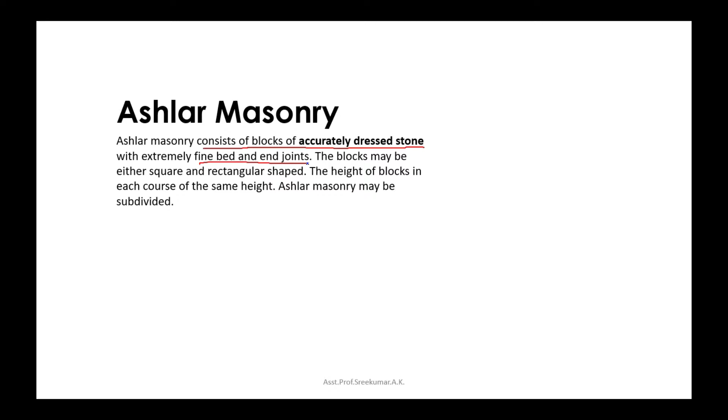Now let's move on to the next topic: ashlar masonry. Let's look into its definition. Ashlar masonry consists of blocks of accurately dressed stone with extremely fine bed and end joints. Bed joint is the horizontal joint and end joint is the vertical joint, so it consists of blocks with perfect horizontal and vertical joints.

The blocks may be either square or rectangular in shape. The height of stone varies from 25 to 30 centimeters. The height of blocks in each course is of the same height.

Ashlar masonry may be subdivided into the following categories: ashlar fine tool masonry, ashlar rough tool masonry, ashlar rock, rustic or quarry faced masonry, ashlar chamfered masonry, ashlar block in course masonry, and ashlar facing masonry.

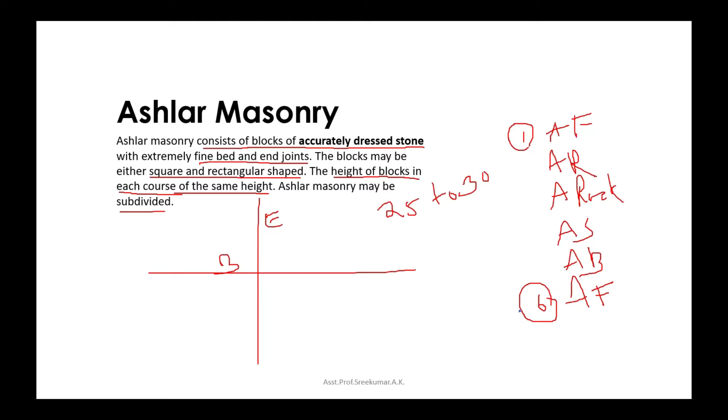Now let's look into the detail of the first type of ashlar masonry, called ashlar fine masonry. This is the finest type of stone masonry work. Each stone is cut into rectangular required size and shape so as to have all sides rectangular, so that the stone gives perfectly horizontal and vertical joints with the adjoining stone, as you see in the figure. The beds, joints and faces are chisel dressed such that all waviness and unevenness is completely removed and a fairly smooth surface is obtained.

The thickness of the courses is generally not less than 15 centimeters. The width of stone is kept less than its height. Headers and stretchers are laid alternatively in each course, or course of headers. The thickness of mortar joint is kept uniform throughout and should not be more than 5 millimeters. The exposed joints are finely pointed.

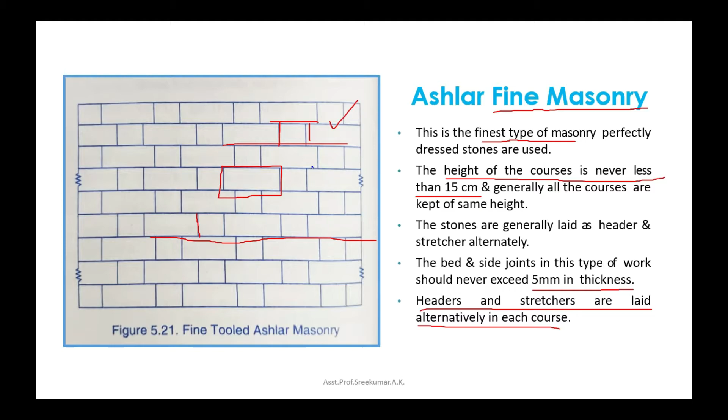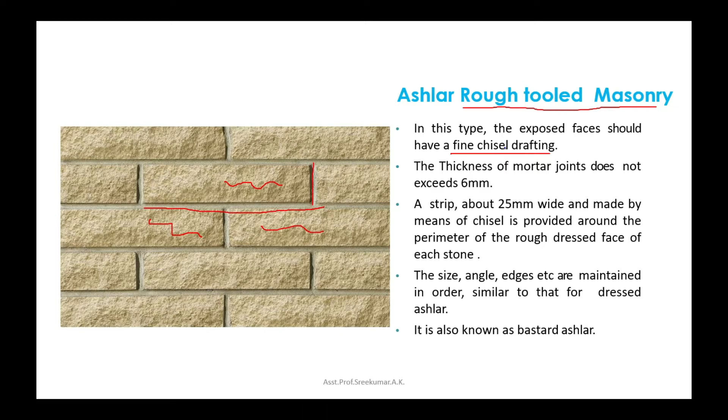Now let's get into the detail of the next type of ashlar masonry: ashlar rough tool masonry. Here the beds and sides of each stone block are finely chisel dressed, just in the same manner as for ashlar fine masonry. But the main difference is that the exposed face is dressed by rough tooling, so the exposed face of the stonework is maintained as it is, quite rough.

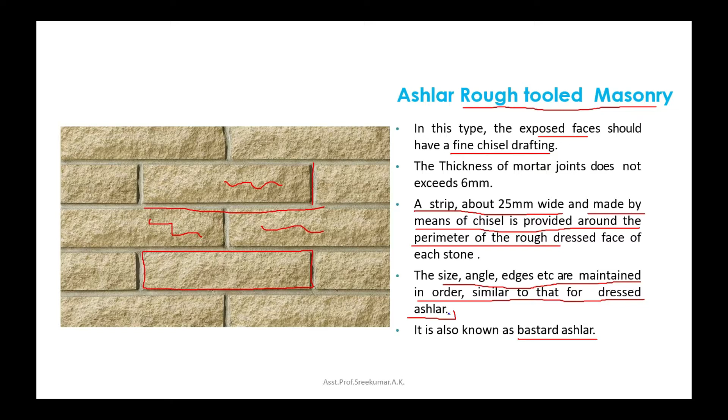A strip about 25 millimeters wide is made with a chisel around the perimeter of the rough dressed face of each stone. This type of masonry is also known as bastard ashlar. Here the size, angles, edges, etc. are maintained in order similar to that of dressed ashlar masonry. The thickness of the mortar joint here should not be more than 6 millimeters.

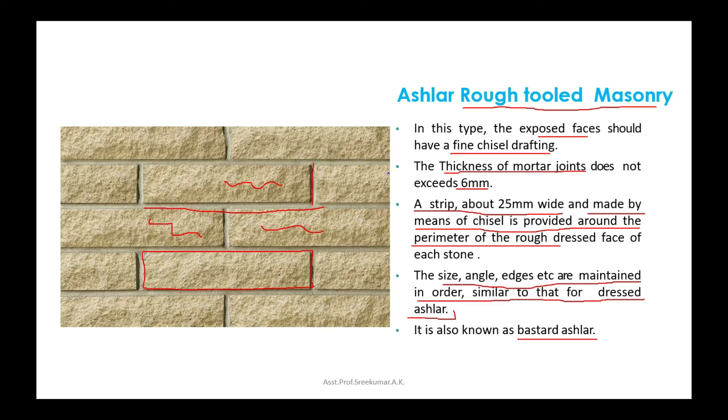Now let's look into detail the next type of ashlar masonry, called ashlar rock face masonry. In this type, the exposed face of stone is not dressed but is kept as such so as to give rock facing. However, a strip of about 25 mm wide made by means of a chisel is provided around the perimeter of the exposed face of every stone.

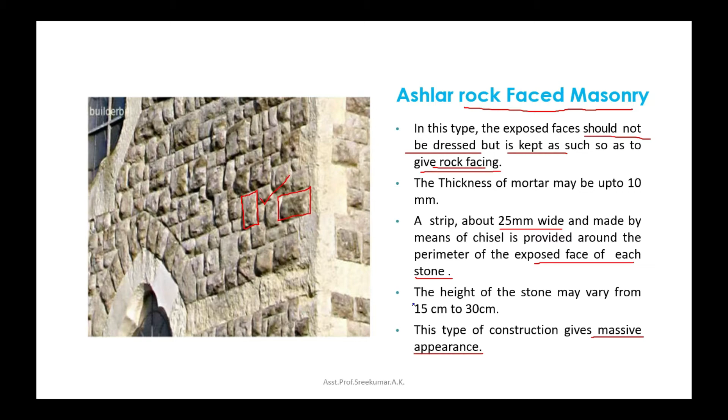The projections on the exposed face exceeding 80 mm in height are removed by light hammering. Each stone block, however, is maintained true to its size with perfectly straight side faces and beds, and truly rectangular in shape. This type of construction gives a massive appearance. The height of each block may vary from 15 to 30 centimeters, and the thickness of mortar joint may be up to 10 millimeters.

The main difference between ashlar rough tool and ashlar rock faced is that in rough tool ashlar, the exposed face is dressed by rough tooling, whereas in rock face masonry, the face of stone is not dressed but is kept as such so as to give rock facing.

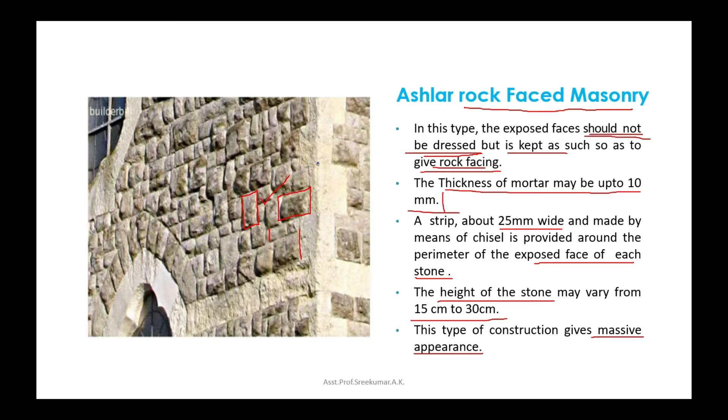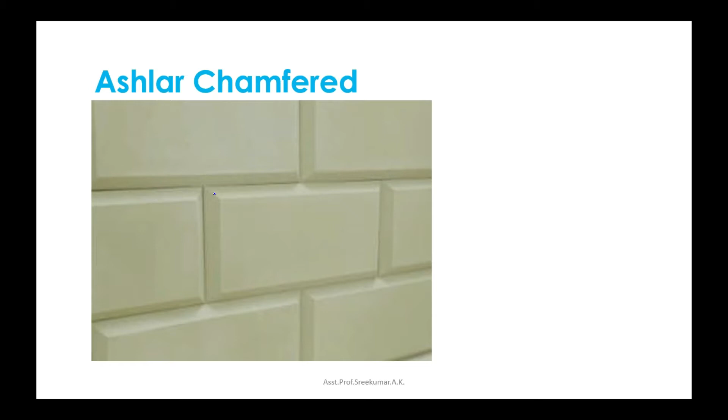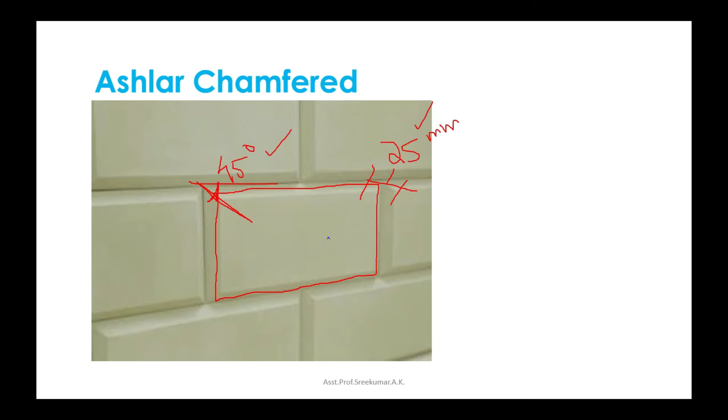Let's look at the next type of ashlar masonry, called ashlar chamfered masonry. As shown in the image, this is a special form of rock-faced ashlar masonry in which the strip provided around the perimeter of the exposed face is chamfered or beveled at an angle of 45 degrees by means of a chisel to a depth of 25 millimeters. Due to this, a groove is formed between the adjacent blocks of stone.

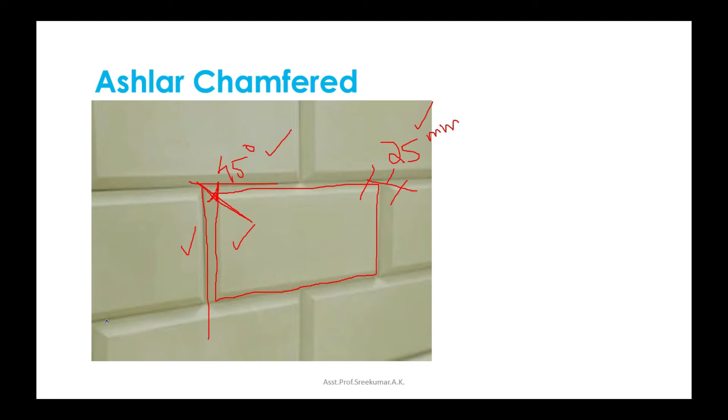So that's all about ashlar chamfered masonry.

Next, let's look into ashlar block in course masonry. This is a type of masonry intermediate between rubble masonry and ashlar masonry, not as fine as ashlar but a mix between the two. The faces of each stone are hammer dressed. The height of the blocks is kept the same within any course, although it's not necessary to keep uniform height for all the courses.

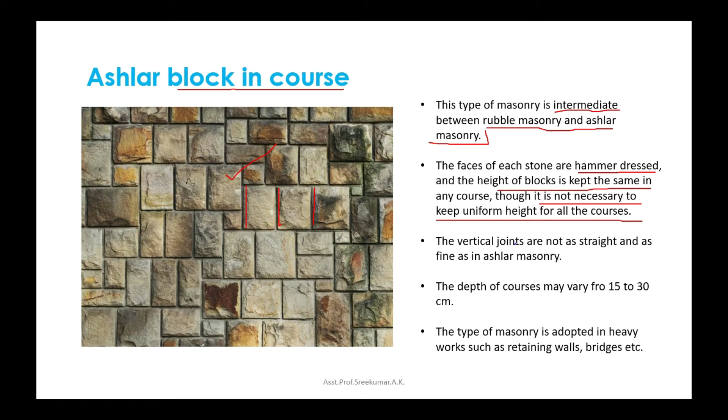The vertical joints are not as straight and fine as in ashlar fine masonry, as you can see in the image. The depth of the courses may vary from 15 to 30 centimeters. This type of masonry is adopted in the construction of heavy works like retaining walls, bridges, etc. That's about ashlar block in course masonry.

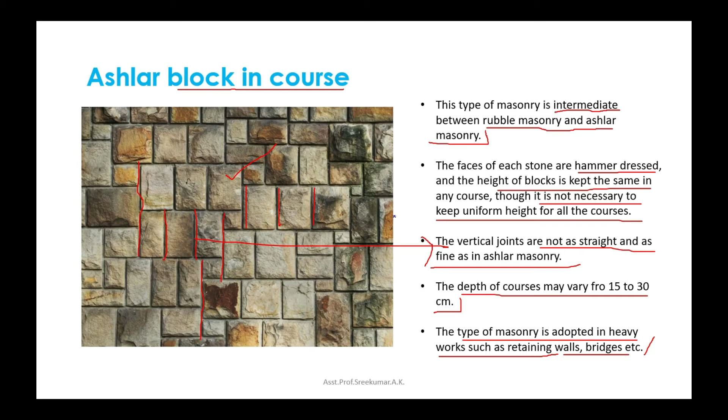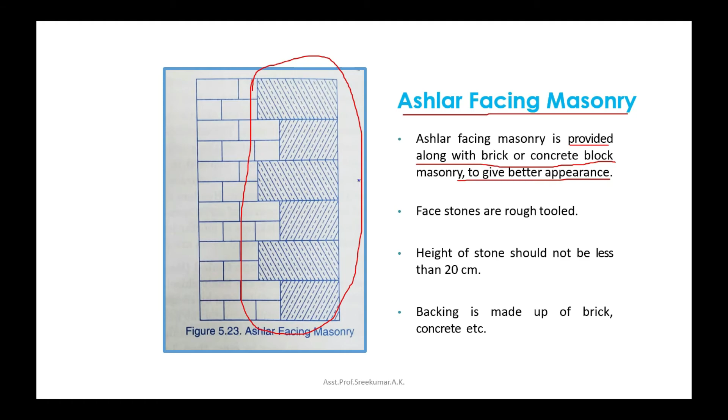Next, we have another type called ashlar facing masonry. This type is provided along with brick or concrete block masonry to give a better appearance. As seen in the image, we have the shaded region as the stones and the other region as bricks. Face stones here are rough tooled, and the height of stone should not be less than 20 centimeters. The backing is made up of brick, concrete, etc.

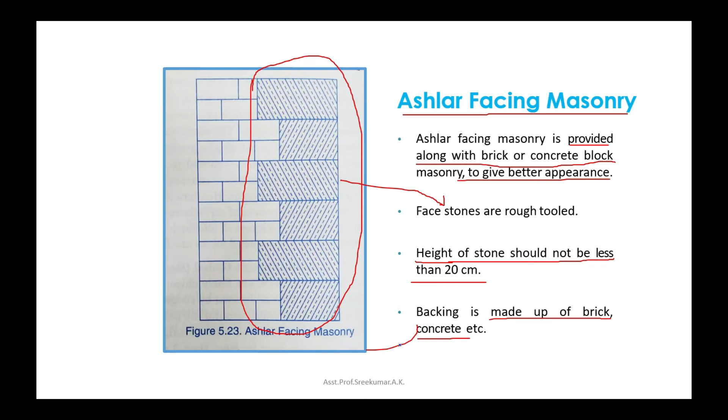Now look into the image. It's pretty clear about how to use stone as facing with brick or concrete.

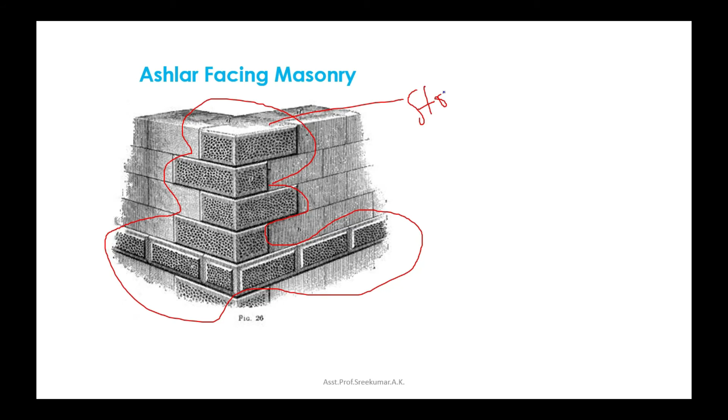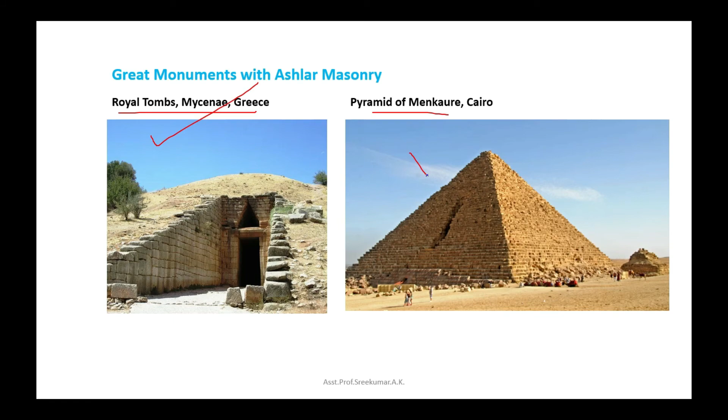These are some of the great monuments with ashlar masonry. The one on the left is the royal tombs at Greece, and the one on the right is the pyramid of Menkaure at Cairo. Now let's see the difference between stone masonry and brick masonry.

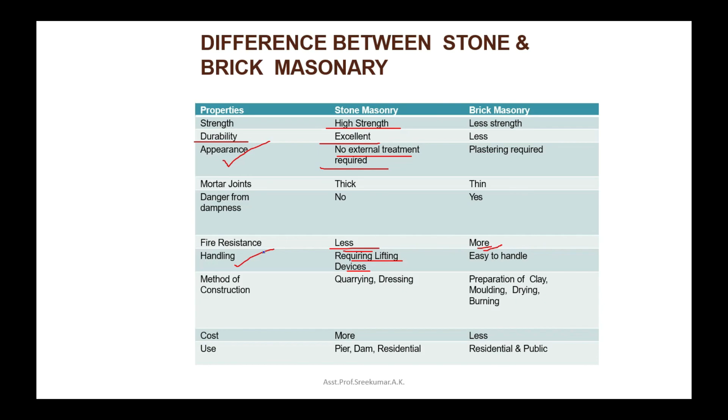Stone masonry has high strength and excellent durability compared to brick masonry, and no external treatment is required for appearance. However, it's less fire resistant compared to brick, and there is no danger from dampness for stone masonry. However, it requires lifting devices for handling, and the method of construction normally involves quarrying and dressing stones, and the cost is more compared to brick masonry. We usually use stone masonry for large structures like piers, dams, and other huge residential projects.